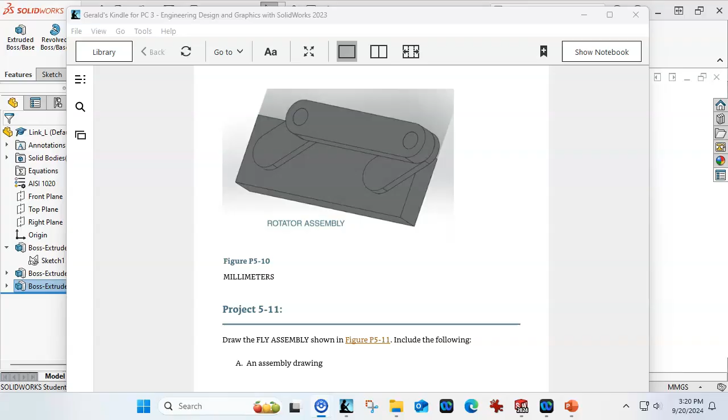For P5-10, the rotator assembly, I'm mixing up the order a bit. I would like you to go through and attempt the parts on your own. We're going to follow the instructions at the beginning of the project.

We're going to make an assembly drawing, an exploded isometric view with assembly numbers, parts list as the bill of materials, and they're asking that we remain parallel on the crosslinks. We won't really see why that is until after we've made the assembly. And then we'll also put this into an animation, although you won't need to turn in any animated videos as they get quite large.

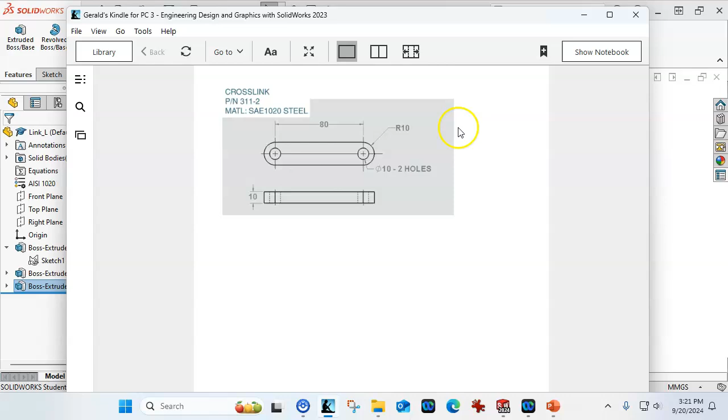All right, so at this point we're going into the assembly. There is a video for the parts if you get stuck or have trouble with them, but take them as far as you can. This geometry is pretty straightforward, so should not give too many issues. So looking at the rotator assembly,

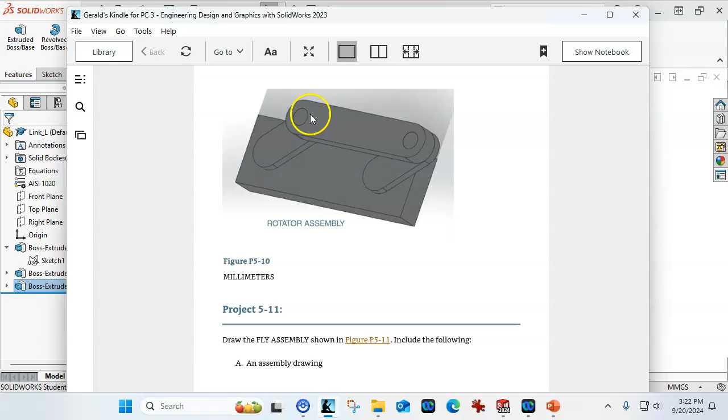choosing the part, I am going to recommend, and you're going to see this, we've done a few intro videos in the introduction. The recommendation is always that you bring in one part at a time, get it situated, location, orientation, position, all of those fun things, that it is where you want it and doing what you want, and then bring in the next piece, and then the next piece. At that point the order doesn't really matter, it's just one at a time. It'll save you a lot of headache of a lot of different things going on at once.

All right, so the assembly, we're going to go into new, pick our assembly, and I am in inch, pounds, and seconds. That doesn't play a part because we're not dimensioning the sketch, but as I'll mention in the parts, if you missed the units and you drew this in inches, your numbers at 15 and 30 are going to make really huge parts. And some of them, if they're in metric, are going to be really small parts. So you do want to pay attention to units, but we can switch back and forth between inch and metric in the assembly, and it's not going to have any major issues.

All right, so for this, we're going to stay with insert components. As we go more into the introductory projects, I've allowed time to review that information so that you have plenty of opportunities to see how these all fit together. So when I insert the components, my three items that I've created are still open, and the plate is going to be my choice. And because it's drawn in the front plane, when I go to the OK, it's just going to position it. If I click anywhere in the work area, it's going to position it, and the origin's going to be a little bit off.

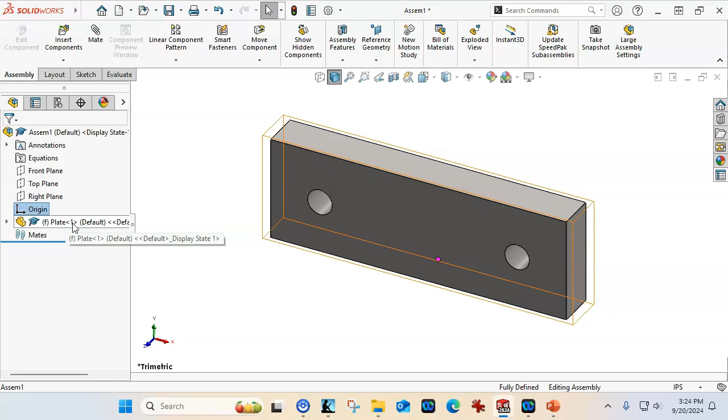Not a big deal. When I look at the origin, I know that I put the origin on the part there, and it aligns origin to origin and applies it as fixed. If it comes in any other way, we'll probably go ahead and build it this time and not worry about it. But if it becomes something that you do want to change, the F is for fixed, and when we float it, that will go away. So we're going to do more of those, but go ahead and click the OK so that it places, and then we're on to inserting our link L's.

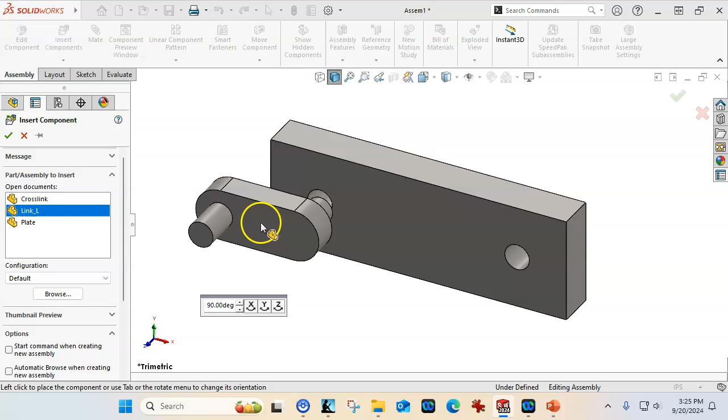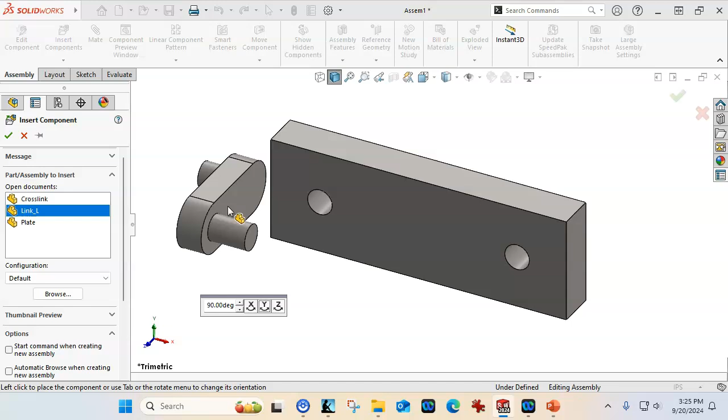All right, so insert component, because they are open, they're showing up in the list, and I can drag them into position. Now this one I do not want to be fixed, so lining it up and trying to just visually put it there, that's not the point. Besides, it's backwards, so since I have the rotate X, Y, I would rotate about Y. On one of my computers that doesn't show up. I'm pretty sure it's checked over here, the show rotate context, and for some reason I've lost it off the screen somewhere. So we can also right click and do rotate.

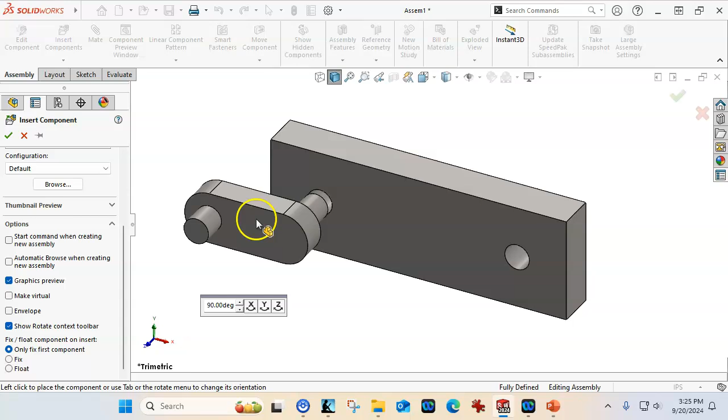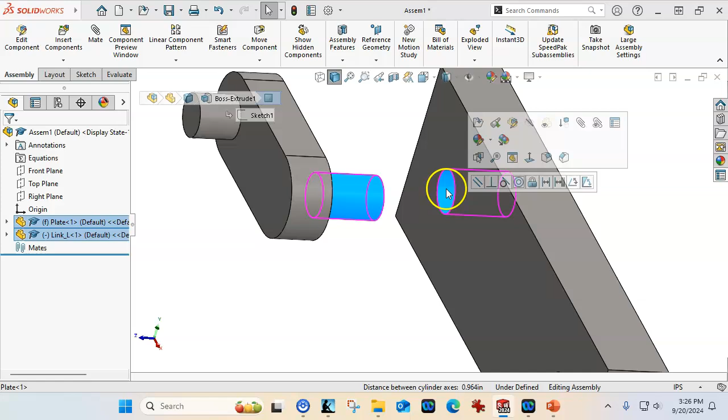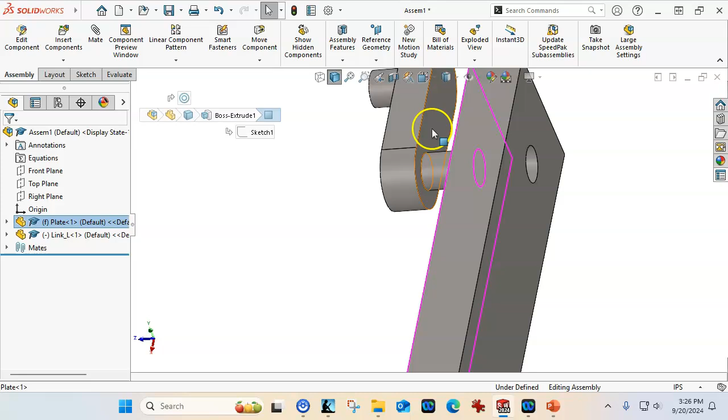And same thing, I can get it kind of close, but if I really go to look at this, I'm off and I'm off again. So we don't really want to leave those just anywhere. So we're into our select, control select. The hierarchy is going to be faces and afterwards edges. So a cylindrical face to a cylinder to a bore will be concentric. And then if I want to see where this contacts the back of the part, or where the end of the shaft contacts or penetrates through the back of the part, I could go that route as well. So we're going to select the face of the plate, control select the link, and make those coincident. Let's see that that flushes out.

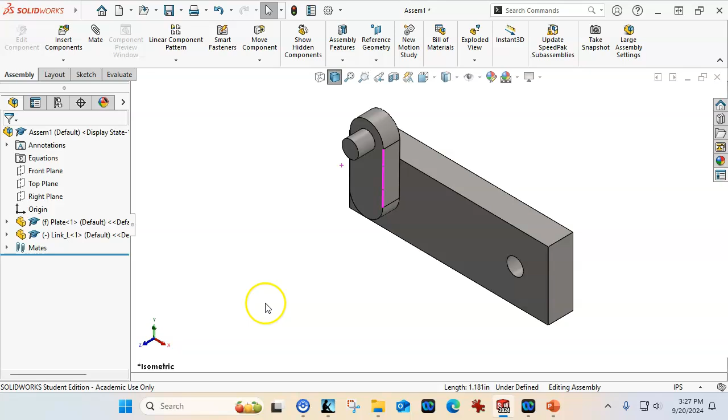All right, so this is where we get into degrees of freedom. Right now, this only has 1 degree of freedom, rotating about Z. When we talk about translation along X, Y, and Z, being able to move, that is 3 degrees of freedom. Rotation about each of those axes is then our other 3 degrees of freedom. So when I say we have 1 degree of freedom left, it's because the link is free to rotate.

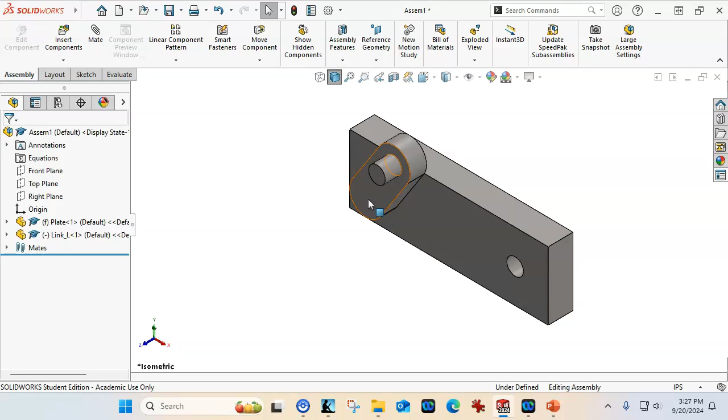All right, so we did the insert component. If I hold down the control button and drag from the tree, or hold down control, shift select, or select, control select and drag, that's going to bring in another instance.

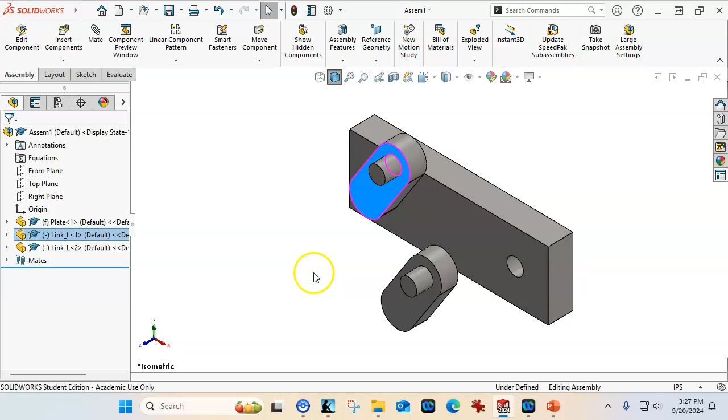So these instance counts, 1 and 2, are just increments of value. If I were to delete 2 and bring in a third one, it'd go to 3. We're not going to worry about them being out of order or not having a 2.

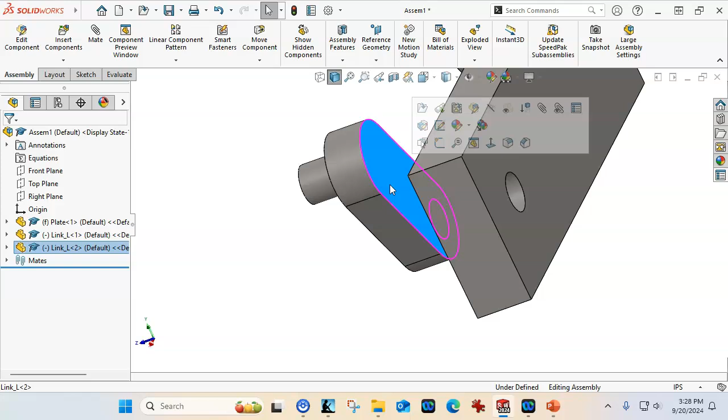But since they're in order, we're ready to select the bore and then control select the shaft, and then we can go concentric, select, control select, and we'll talk about what just popped up there. Hold down control, and you're going to get really good at rotating with the middle mouse button to change the view to make these coincident. And then the little double arrow is for mate alignment.

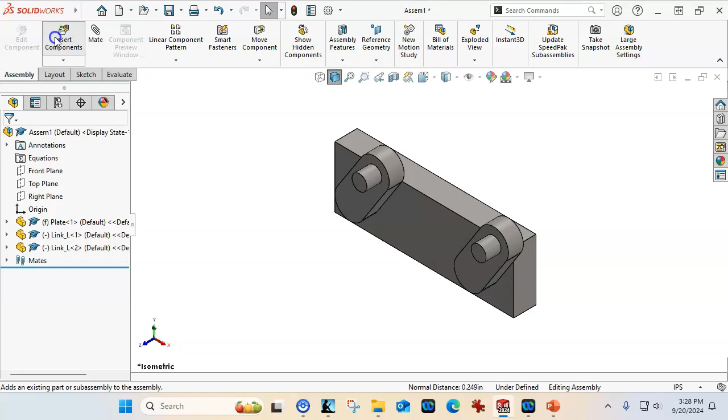All right, so let's do the last one of these with the mate, and we'll talk more about why that works. So let's insert the component. Since this is a regular piece, it comes into the view. Doing the control button is if I'm selecting out of the work area and I'm waiting for the context.

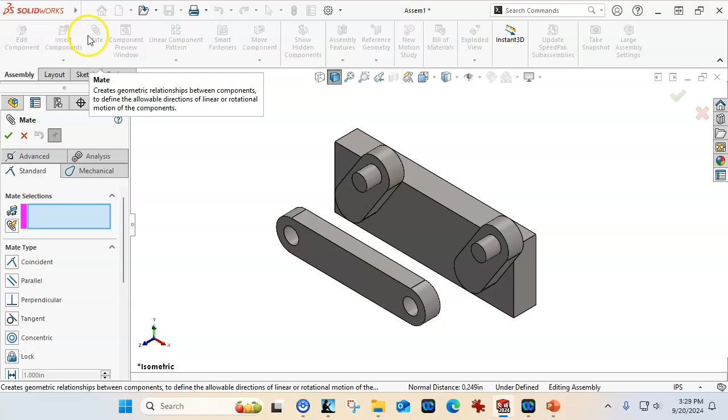That's always going to be fastest, but if it doesn't cooperate, isn't working, we go to the mate paperclip, and now we're just picking. I can select cylinder to cylinder, and it will give me the same item.

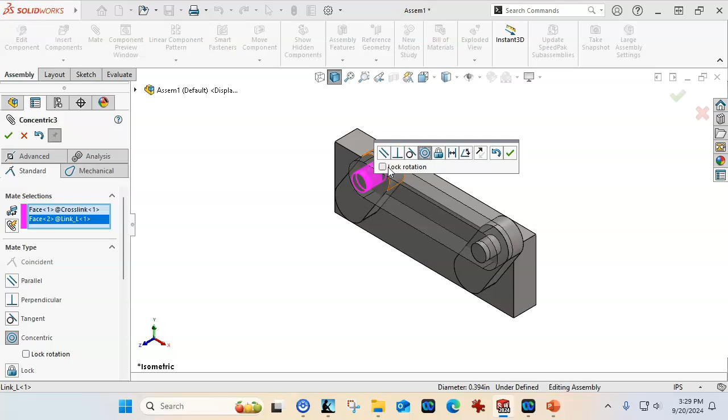And then if we didn't want this to turn, I could lock rotation. In this case, we do want it to rotate. So usually lock rotation is good for putting in hex bolts or cap screws or panhead screws. Whatever position they are rotationally doesn't matter, I'm just looking for the length and that they're seated to whatever surface. So that would be when we want to lock rotation.

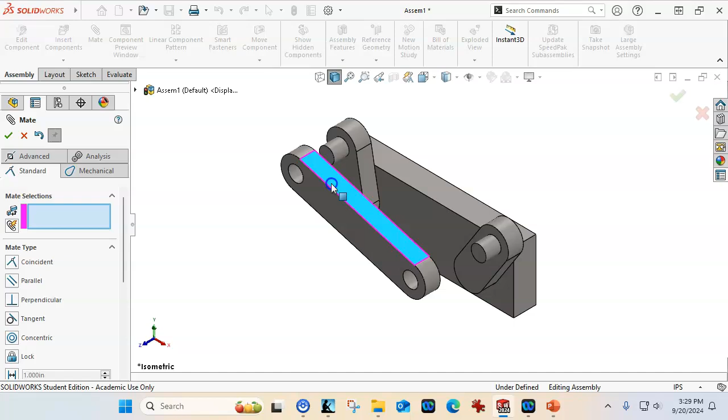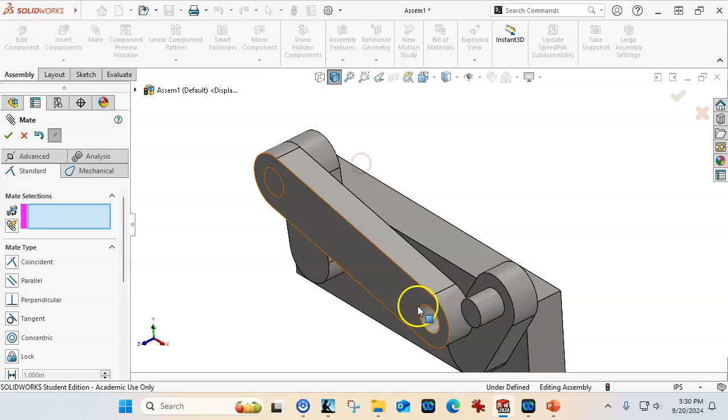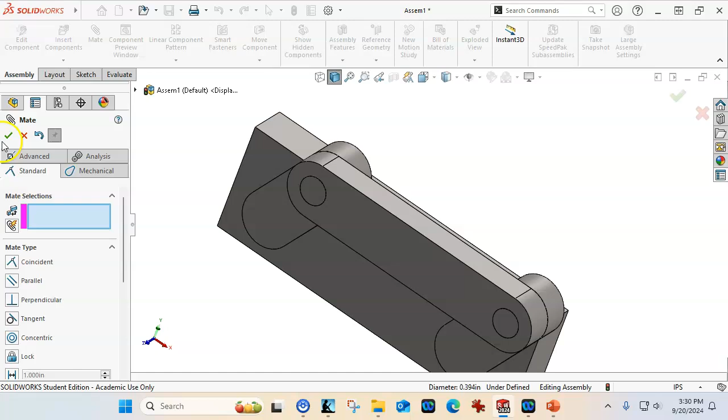So I'm able to move, and this is now going to be a select. Again, I'm in the property manager for the mates. All I have to do is select the faces, and then we're going to go ahead and accept. This one should line up with this one, this face to this face. At this point, I'm still in - my fingers are migrating towards that control key, but I don't need it. Then as soon as I place the two faces, now they are in line.

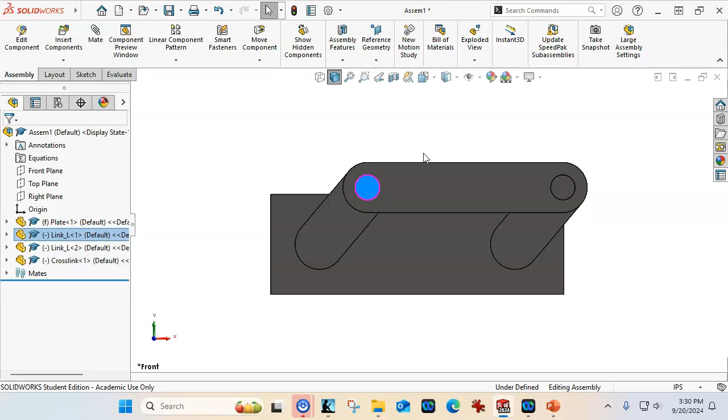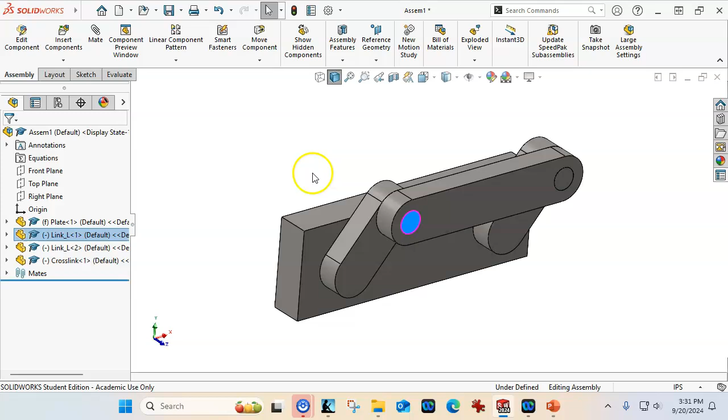Okay, so the mention of staying parallel - because if we rotate this enough, there is a spot where this will become more of a crank arm than a follower rotator. Now, on the mechanical side, knowing that it does that, we don't have any mechanism in the real world in this design yet to keep it from doing that. So we would have to come up with a way or limit to the motion to keep those aligned. But it does tell us that there is a place where it will move and it can get there, so we just have to be aware of it for now.

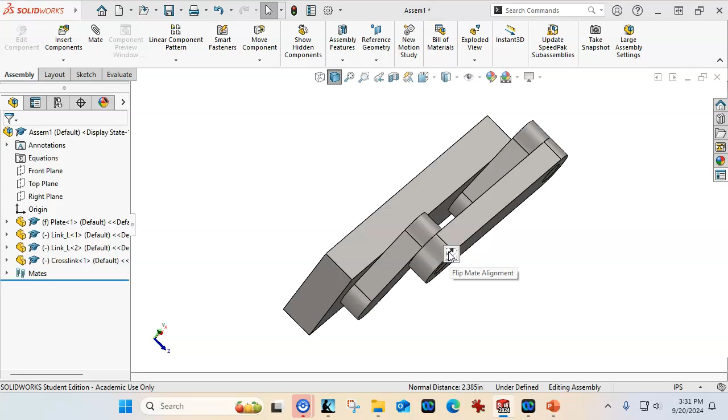All right, so I'm going to do the select, control select, and go parallel and see if it pops up. This one is just the flip mate alignment, and if we flip the mate alignment, that is an alternate solution. If I'd gone coincident and it put it into the part, I would have flipped the mate alignment. The other concentric is to lock the rotation, pops up on that little context and keeps it from rotating. So if you do accidentally click it, the concentrics are going to have lock rotation, and all of the mates are going to have the ability to flip the mate alignment.

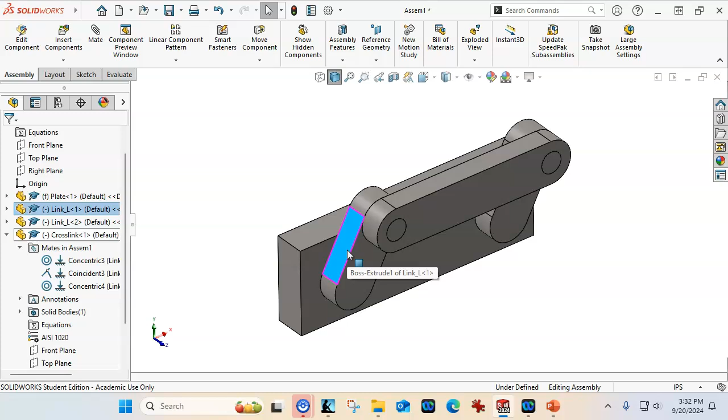All right, so now this is able to move, and for the drawing, I would like it to stay in position. If I move this in the assembly or it does something, I really want this to be static. These minus signs are telling me that the rotation and the movement is because I have only controlled 5 degrees out of the 6 degrees of freedom. So that face is already selected. I can hold down the control button, select the end face, and I'm just going to set an angle.

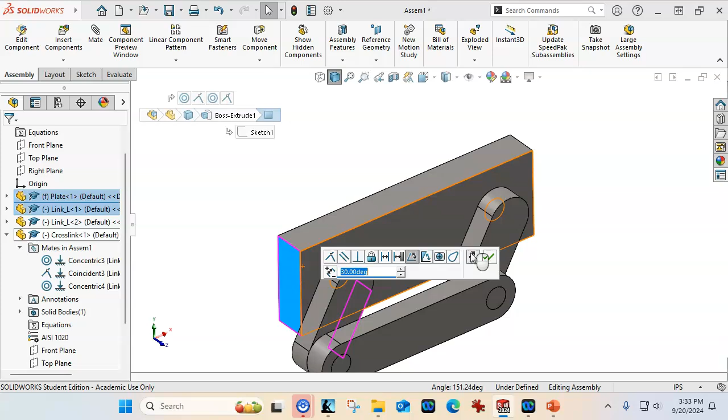30 degrees looks good. Let's see what happens if we do flip the mate alignment. May not like that one - there it goes, goes to the opposite 30 degrees. All right, so not going to be the adjacent angle - yeah, I don't remember that one. So then flipping the dimension is another option, sends it that way. So you have choices to line this up.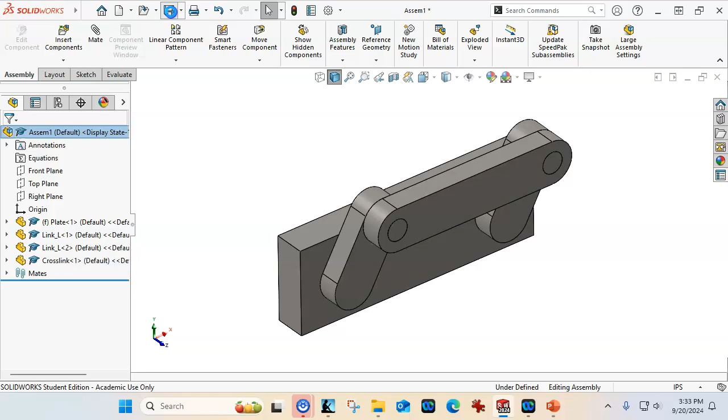The main thing is we are going to be able to have as a default our static item. When we go to animate this, we're going to set up a configuration. Configurations are very handy to control the properties and building these parts and watching them move. So let's go ahead and save this as the rotator assembly, and then watch the parts next to see how I did it, and then we'll go into the drawings in the video after that. So let's save, and we'll be good there.